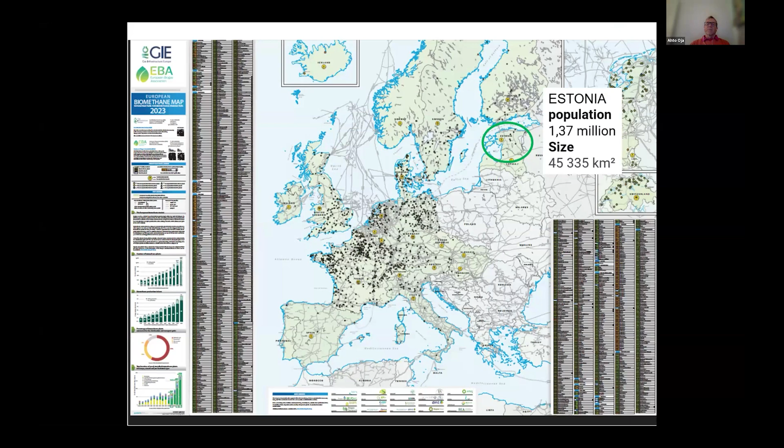That's Estonia, just to show how small we are. Actually, size just 45,000 square kilometers and 1.37 million inhabitants, so pretty small, just to give the overview to the international audience. Historical insights: the first overviews about the potential were made around 2000, almost 25 years ago. After that, my consulting company, Mõnus Minek, was established in 2007, and we were an establishing member of the Estonian Biogas Association, which was again an establishing member of the European Biogas Association. So we are on the scene in Europe since the very beginning.

We had one European knowledge transfer project, Gas Highway, to transfer the best European knowledge and experience of that time to Estonia. And using also this knowledge, we developed the Estonian renewable fuel roadmap as part of a long-term energy action plan. And that was kind of the starting point for the sector development in Estonia. So we first really convinced the politicians and decision makers, and also used the structural funds to support the sector since 2014, I would say. So that's the current situation.

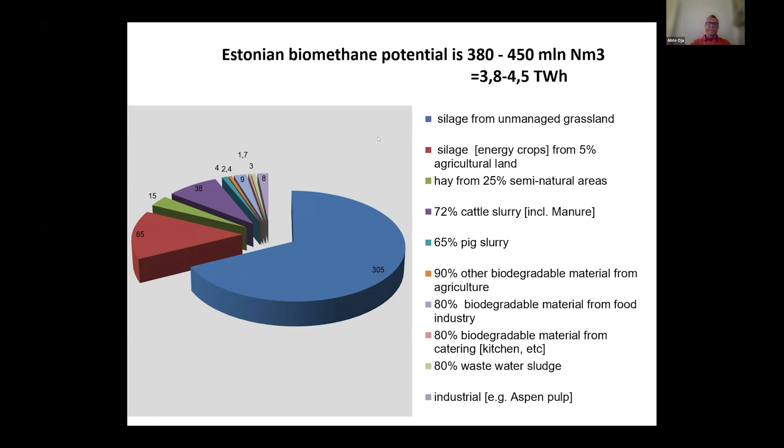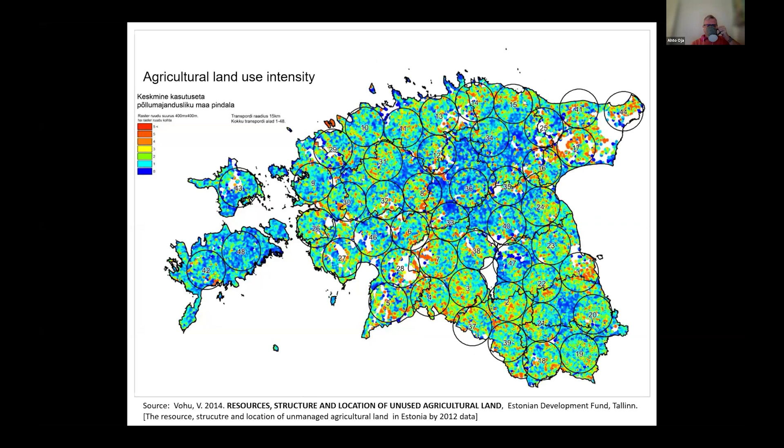The land has been analyzed several times. It shows that blue is more in use, red color indicates that it's less used, and there's unused green biomass. It indicates that at the maximum level we can establish up to 48 biogas or biomethane plants all around Estonia.

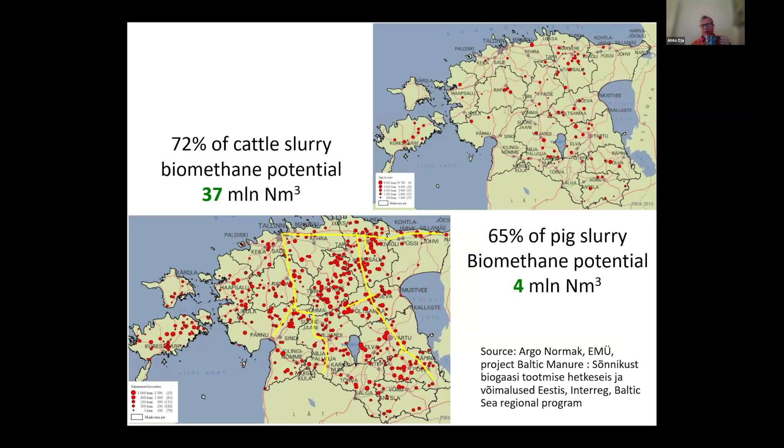This is the current updated map. Here we can see the farms, also the piggeries, chicken farms in yellow, and also the biogas plants on the Estonian map at the moment. And here the black line is the transmission grid.

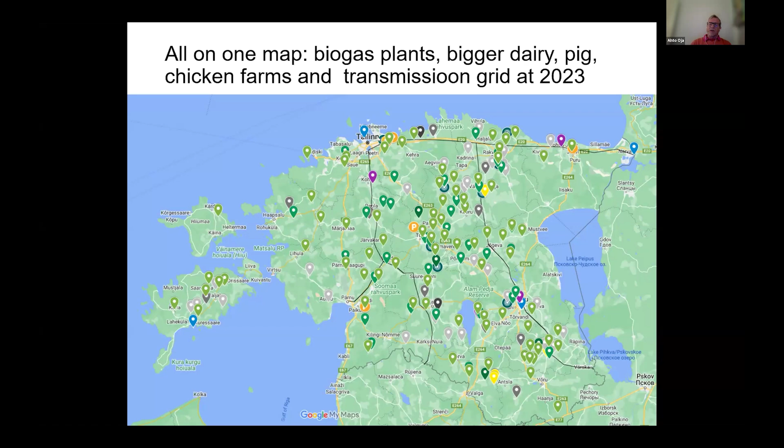That's the consumption in Estonia. We say that there was maybe around 3-4 terawatt hours of natural gas consumption all over Estonia, and in the maximum case by 2050 we can substitute the natural gas with local renewable Estonian biomethane.

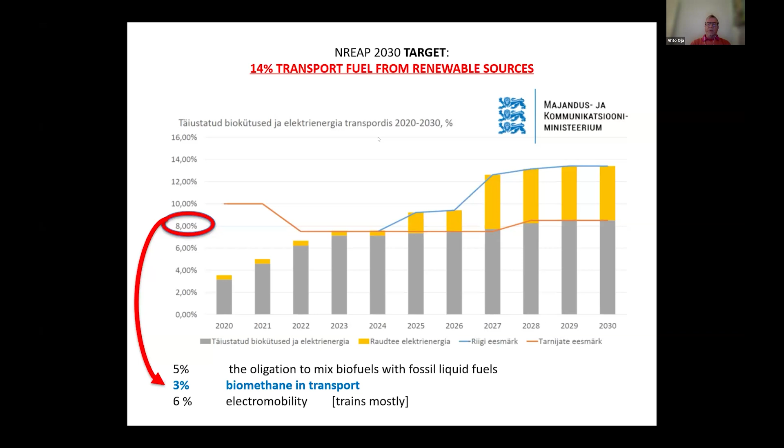There's a national plan for 2030 with an obligation of 14% renewables in fuel, and the plan is that 3% of that will be achieved with biomethane in transport. The reason behind this is that the other renewable targets for electricity and heating or cooling are already achieved and over the target, but in transport it's really on the edge and just catching this target.

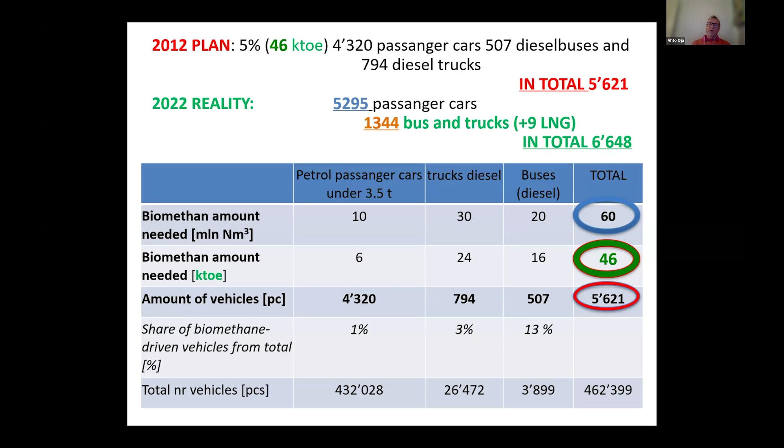This shows the development of the sector with vehicles. In 2012 we made a plan of how many vehicles there could be. The estimation was 5,600, and 10 years later the actual situation was better. We had almost 1,000 more vehicles, in total 6,600 vehicles in transport using biomethane. And also buses in almost half of the counties or cities, city transport which is outsourced by procurement procedure, are using biomethane.

That's the filling station map currently on the website biomethane.info. Everybody can find addresses and locations in Estonia.

And the market has developed with the biomethane register, which has been run by the TSO, Transmission System Operator Elering, since 2021. The biomethane register connects all market participants: producers, sellers, operators, liquid fuel sellers, and soon also hydrogen. Now renewable electricity in transport is also connected to this. This register also issues the certificates and keeps the certificate trading platform up. So those selling either biomethane molecules or certificates can make an offer there, and others can make offers and buy these certificates.

So as I said, to fulfill the national transport obligation, we have to have 14% renewables in transport. This demand can be covered either by physical blending with bioethanol or biodiesel, or you can fulfill this obligation with biomethane certificates. So it really opens the market for biomethane certificates to the total consumption of fuels in transport. The certificates are tradable against other types of fuels. So that's the biomethane guarantee of origin or proof of sustainability. Either you buy bioethanol, or you can buy the biomethane certificate and fulfill this obligation with that.

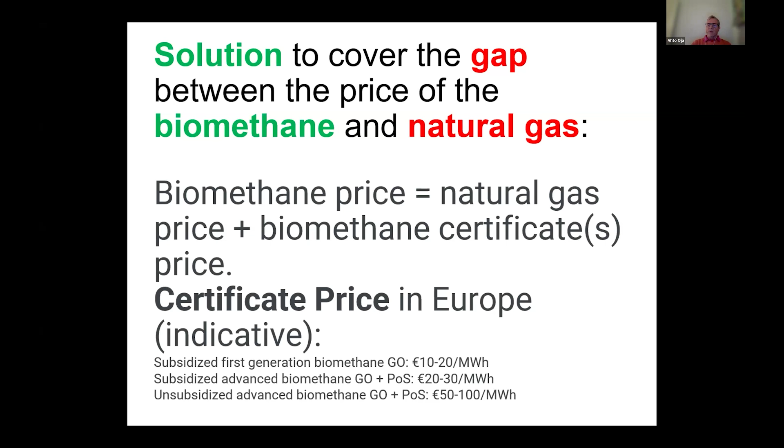And this is the solution to cover the gap. The price of the biomethane certificate is the solution to cover the gap between the biomethane price and the natural gas price. So usually the producer gets the natural gas price for the molecule, and on top of that the biomethane certificate. From our TSO presentation, a first generation biomethane certificate could be up to 20 euros per megawatt hour. And in the best case, both guarantee of origin and proof of sustainability can be between 50 and 100, and it usually depends on the feedstock, location, transport, carbon intensity, and different kinds of factors.

And this is an example. You can also see this publicly yourself on the website. The TSO Elering keeps this data, and it's in Estonian, I can't translate it, but it's bilateral pre-agreements: 130 transactions were made, and the average price was 103 euros. In the second quarter of 2024, it was 131 transactions, and the price was 121. So the average price per quarter is indicated on the TSO website, the Elering website.

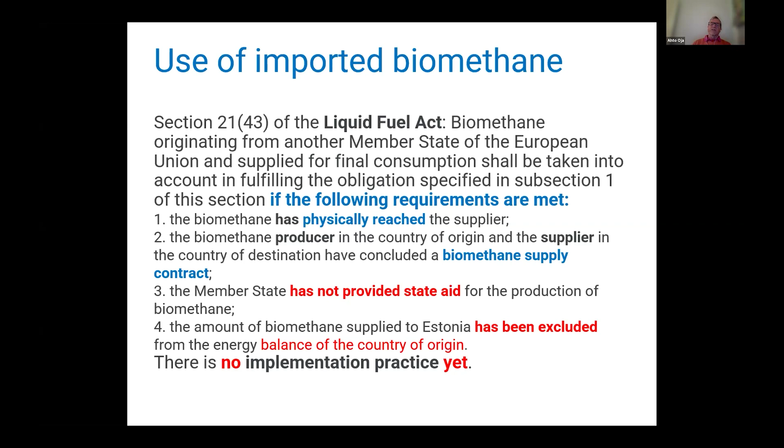And also, starting from the bottom, the implementation practices don't exist yet, but we are thinking of also importing and exporting. If it is imported, then it has to be physically delivered here, it has a contract with the seller, and it has to be not provided state aid. And the amount imported to Estonia has to be excluded from the exporting register, to avoid double counting.

And if we want to export, it's also now possible by the legal acts. We can inject into the transmission grid, and then in that case the certificate will be removed from the Estonian register, transferred to the importing country, and counted as their part.

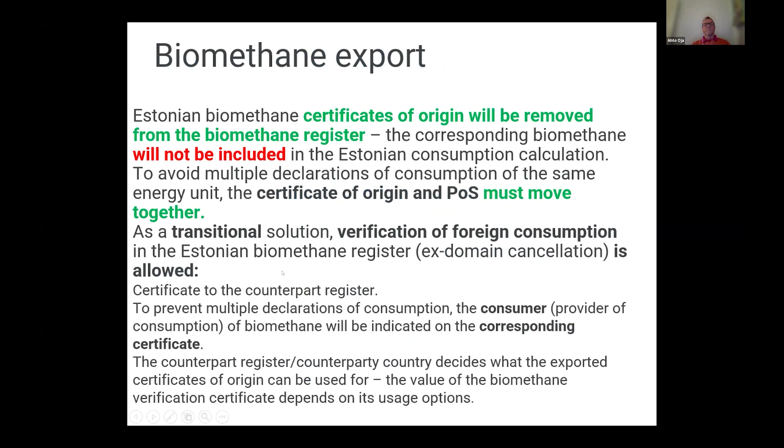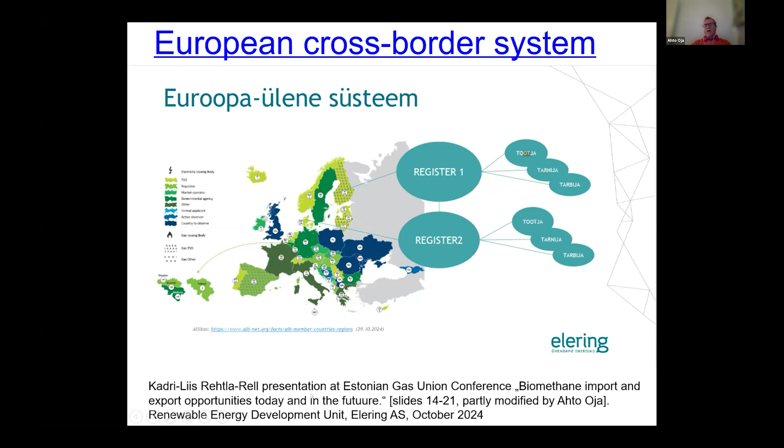And the European cross-border system is that the registers of different countries have to make agreements, either bilateral or maybe in the future pan-European, and then the producers, transporters and sellers can trade, import and export biomethane through these registers. And the last 7 slides were from Kadri-Liis Rehtla-Rell's presentation, just for clarity.

I didn't count it in minutes, so I think we are close to 10 minutes. Ryan? Yeah, approaching there.

Also, to some extent, digestate as fertilizer is regulated in Estonia. It has to meet certain criteria given in the ministry regulations, and then you can sell it as a product and gain extra income if not all the digestate is used by the farmer. And those are the plans for the future.

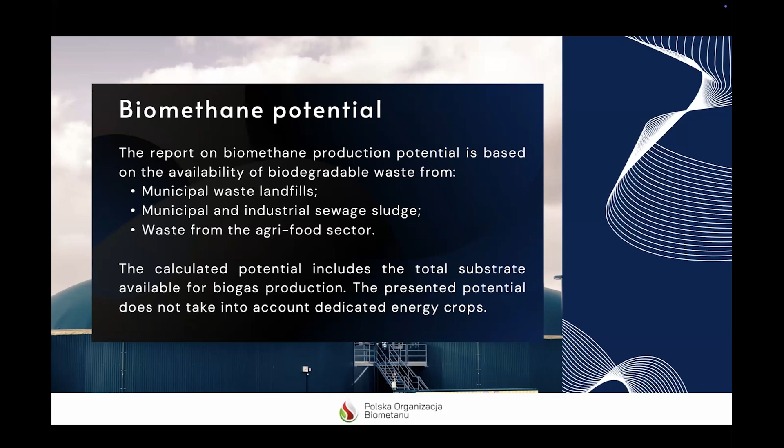Yes, so as a part of our analysis of the potential for biogas and biomethane production in Poland, we applied a three-step methodology. The first step involved analyzing the availability of feedstock, such as municipal waste, sewage sludge, and waste from the agri-food sector. The second step focused on determining how much biogas can be produced from these materials. And the third step was estimating the potential for biomethane production, which involves upgrading biogas into renewable fuel. The analysis was based on data from sources such as the Energy Regulatory Office, the National Support Center for Agriculture, the Central Statistical Office, as well as scientific research and industry publications. This methodology allowed us to accurately assess the possibilities and future prospects for the biomethane sector. Next slide.

So as the first topic, I will discuss biodegradable waste, which can be divided into two categories: selectively collected biodegradable waste and biodegradable waste that forms part of mixed waste. The former serves as a direct source of feedstock for biogas production. Selectively collected biodegradable waste accounts for nearly 36% of all selectively collected waste, and its volume is increasing year by year due to growing public awareness. This trend is clearly visible in the chart below, which shows that the volume of this waste grew from nearly 1.2 million tons in 2019 to nearly 2 million tons in 2022.

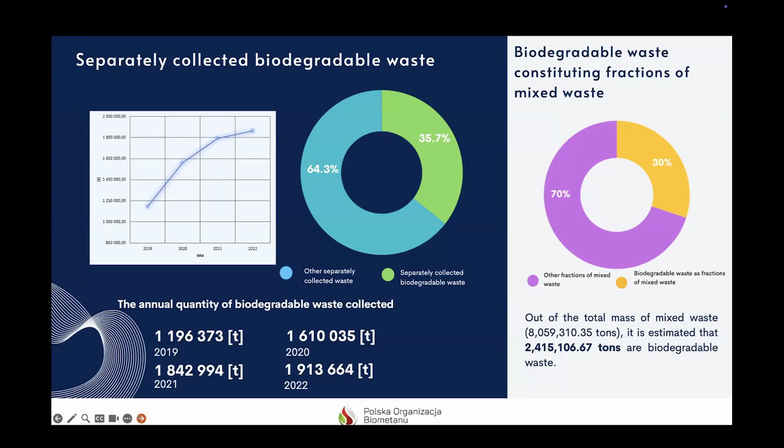Estimating the amount of biodegradable waste within mixed waste highlights the potential increase in biogas feedstock if all biodegradable waste were collected selectively. In 2022, of the total mixed waste of over 8 million tons, as much as 30%, or nearly 2.5 million tons, was biodegradable waste. This illustrates the significant potential for improving waste management and increasing biogas production by enhancing selective collection practices. Next slide, please.

Based on the estimated quantity of biodegradable waste, we calculated how much biogas could be produced and then estimated the potential for biomethane production. Currently, biogas production from municipal waste in Poland amounts to approximately 70 million cubic meters, which could already translate into nearly 42 million cubic meters of biomethane. However, this represents only 13.4% of the total biomethane production potential from this feedstock.

By producing biogas and upgrading it to biomethane from the remaining unused portion of selectively collected biodegradable waste, this potential could increase by an additional 96 million cubic meters of biomethane. Furthermore, if we consider the potential of biodegradable waste within mixed waste, which is still estimated to be greater than selectively collected waste, the total potential from biodegradable waste reaches nearly 312 million cubic meters of biomethane.

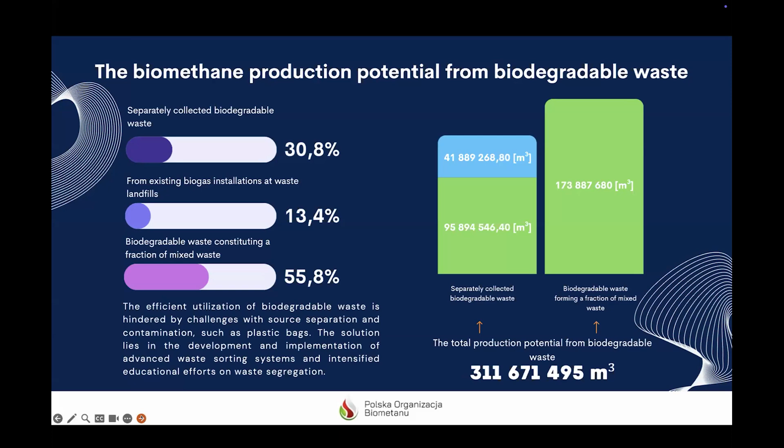These findings highlight the urgent need for development and implementation of advanced waste sorting systems, as well as intensified educational efforts to improve waste segregation. Next slide.

Sewage sludge is currently used in several ways, including use in agriculture, land reclamation, compost production, thermal processing, temporary storage and co-storage, and of course biogas production. What's important is that producing biogas from sewage sludge doesn't stop it from being used in these ways. The digestate left after biogas production can still be used just like untreated sludge.

We should also mention the sewage sludge that has been stored over the years. By the end of 2022, Poland had accumulated more than 6 million tons of sludge. While the sludge initially had great potential for biogas and biomethane production, its energy value decreases the longer it's stored. Over time, natural fermentation releases methane into the atmosphere, lowering its energy potential and increasing greenhouse gas emissions.

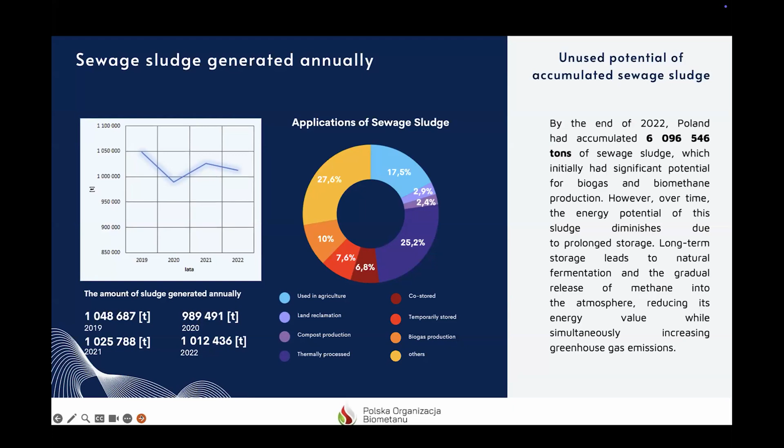This shows why it's so important to improve the way we manage sewage sludge so we can use its full energy potential and reduce its environmental impact. Next slide, please.

The potential for biomethane production from existing biogas installations at wastewater treatment plants is nearly 33 million cubic meters, which represents 14% of the total production potential from sewage sludge. Additionally, the potential for biomethane production from stored and temporarily stockpiled sludge amounts to almost 23 million cubic meters,

and the largest share of the potential comes from the remaining annually produced sludge, which could yield up to 172 million cubic meters of biomethane. When combined, the total annual potential for biomethane production from sewage sludge reaches almost 230 million cubic meters. Next slide.

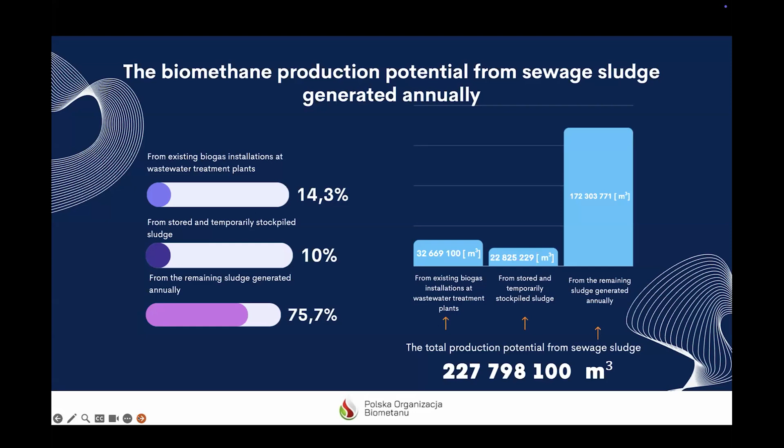And the final sector we'll discuss is also the one with the greatest potential for biomethane production, the agri-food sector. For this analysis, the sector was divided into 3 segments: food processing waste, livestock waste, and straw. The potential for biomethane production from food processing waste was estimated based on the quantities of different waste types. Among these, rapeseed oil production waste has the highest potential for biomethane generation.

The biomethane potential from straw was calculated based on 3 types: rapeseed straw, corn straw, and cereal straw, with cereal straw offering the largest potential of over 5 billion cubic meters. However, it's important to note that straw cannot be used as a standalone substrate for biogas production. It can only serve as an additional component to enrich the feedstock for biogas plants.

The most promising potential comes from livestock waste, with over 4 billion cubic meters from manure, over 2 billion cubic meters from slurry, and over 800 million cubic meters from poultry litter. This represents a huge potential that remains almost entirely untapped in Poland. Currently, only 0.1% of manure, 5.4% of slurry, and 0.3% of poultry litter are utilized for biogas production.

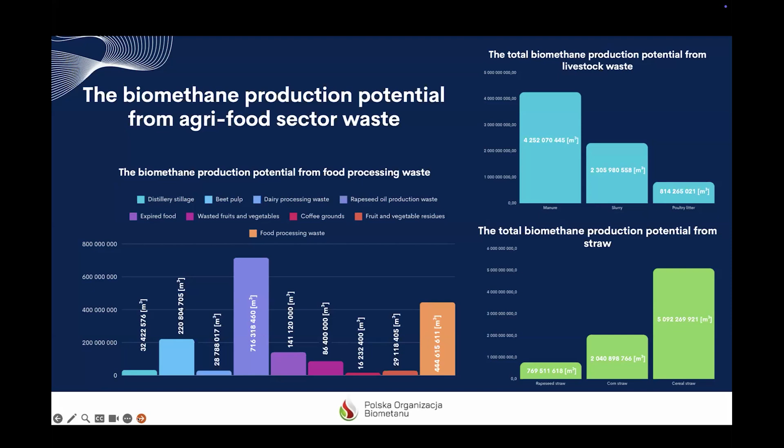At present, there are no installations in Poland for upgrading biogas to biomethane, underscoring the urgent need to develop infrastructure to unlock this waste potential. Next slide, please.

To briefly summarize the agri-food sector, the potential for biomethane production from food processing waste is over 1.7 billion cubic meters. From livestock waste, the potential exceeds 7.3 billion cubic meters, and from straw, the potential is 6.6 billion cubic meters. Altogether, this adds up to a total biomethane production potential of 15.6 billion cubic meters. This highlights the immense opportunity within the agri-food sector to significantly contribute to Poland's biomethane production capacity.

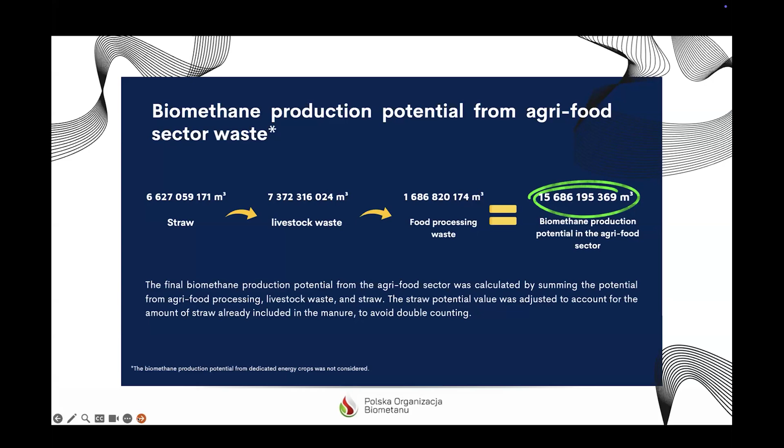So, to conclude, the total potential biomethane production from the 3 discussed sectors is estimated at 16 billion cubic meters. However, the goal of this study was also to identify a realistic production potential for biomethane in Poland, taking into account the limitations and challenges discussed earlier in this presentation, such as inclusion of biodegradable waste within the mixed waste fraction, straw being unable to serve as a standalone substrate and only as a complementary feedstock in biogas plants, and the fact that the livestock waste potential considers all registered farm animals in Poland.

The realistic production potential of biomethane in Poland is estimated at 9 billion cubic meters. It's also important to note that the report's final assessment did not include the potential of dedicated energy crops.

And the last slide, please.

So thank you for your attention for this presentation. As you see, the potential for biomethane production in Poland is substantial, but unlocking this potential will require targeted investments, infrastructure development, and emphasis on sustainability. I hope this presentation has provided valuable insights and highlighted the opportunities within the biomethane sector. Thank you very much.

Could you move it to full screen, Joaquim? Yes, I will. Sorry. Thank you. Now it is. Very well, thank you.

So Sysadvance was founded in 2002. It's a 22-year-old company, and we have specialized in gas separation processes from the beginning. It's a spin-off from academia, and we have developed products for the industrial, medical, and energy sectors. We started producing oxygen and nitrogen generators for industry. Then we evolved to medical solutions for hospitals, like medical oxygen, which was very useful during the COVID pandemic. And since 2015, we are producing solutions to upgrade biogas into biomethane.

We usually provide turnkey solutions, so we take the product from the client, an inlet gas, and we deliver to the client a product within the specification that is required. And within biogas upgrading, we have a full range of solutions, as well as a different line for landfill gas upgrading.

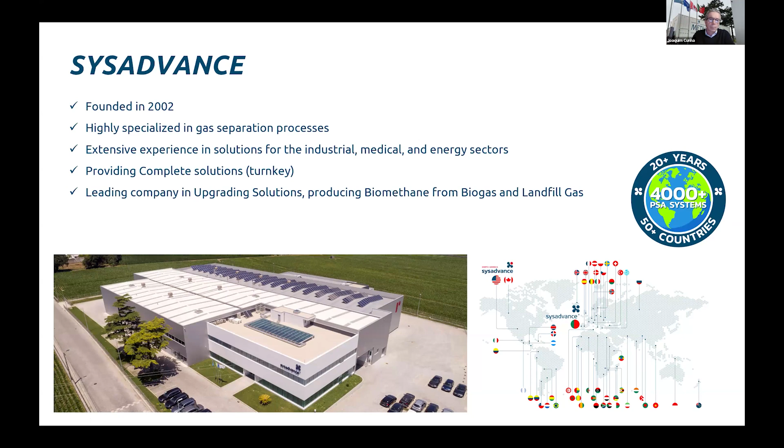Basically, the company is super specialized in everything that is related to adsorption. We have an internal lab that allows us to make real experiments. We have the ability to make numerical simulations. So in the end, we are able to pre-test what is going to happen in real life with a real gas. We are still a spin-off from the university. We keep a very strong relationship with the university, which allows us every year to integrate people from the academic world, bringing new knowledge to the company.

And the company is based, we have a headquarter in Porto, and then we have a company in North America that was created 2 years ago.

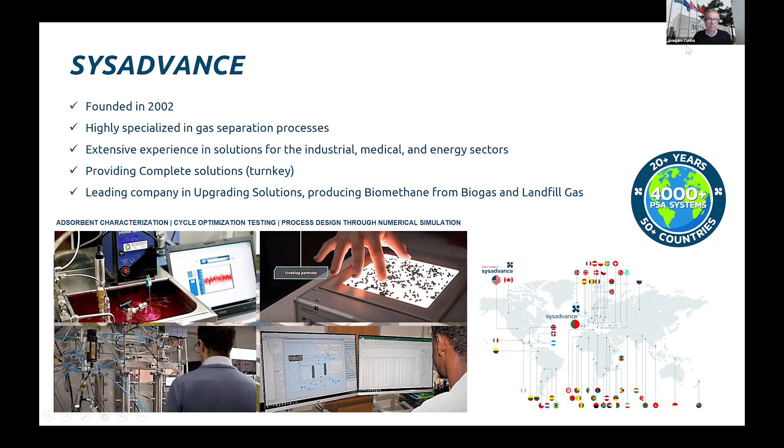And they are primarily upgrading biogas from agro-waste. The second source for biomethane production would be organic municipal solid waste, as well as landfill gas.

Returning to the countries, to the Eastern Europe countries, so we see a significant opportunity. Some countries like Poland, that was previously presented by Martyna, are leading in biogas production. There is a big opportunity for biomethane production, but also Czech Republic and some others. The Baltics, in which I will focus my presentation, precisely Latvia, there is a potential, but there are still some challenges like infrastructure, like regulatory challenges that we need to solve in order to get a sustained growth of the industry.

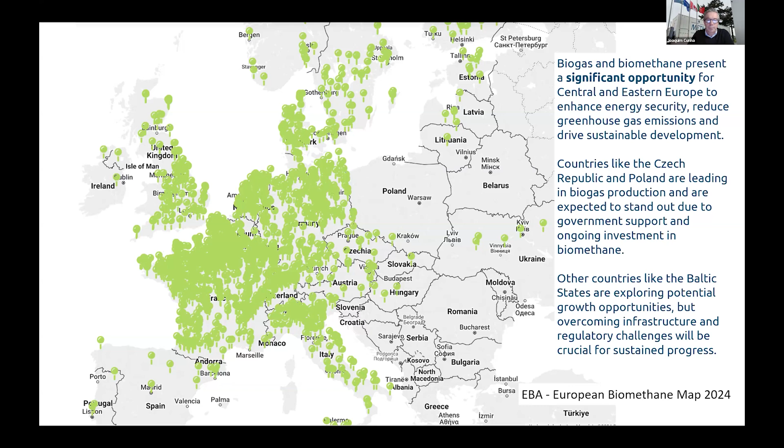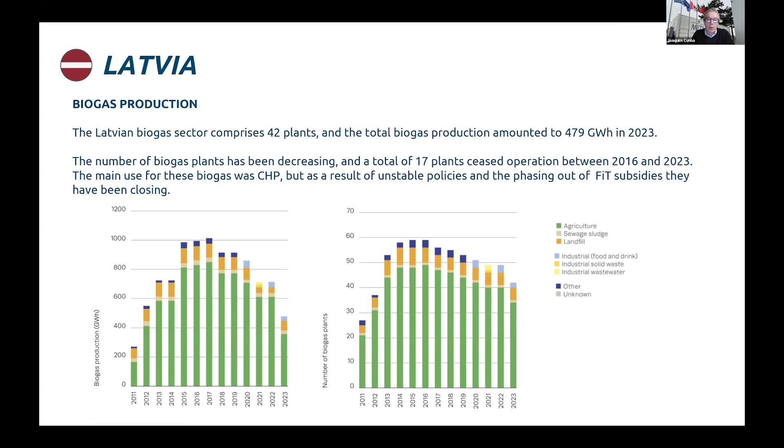When we look into biomethane production, the market needs a more comprehensive strategy, as for the time being, no biomethane framework is in place, although a lot of efforts are being made to implement it. The first biomethane plant was installed back in 2020, and they were producing exclusively for a fleet of vehicles of the company.

Later on, the biogas plants need to transition from electricity to biomethane, as the electricity was no longer viable. Some of them have already made this transition, mainly using their own resources due to a lack of a support policy in place. And this product is mainly being exported. Sysadvance has built one first plant in 2023 and has built 3 others in 2024, which means that at this time we have 4 plants in operation in Latvia. And we know that some greenfield projects are also currently in development phase.

Additionally, as there's a lack of infrastructure, there's a pilot project funded by the European Union in order to install a collection point where biomethane producers could take their compressed biomethane in order to inject it on the grid. So like a collection point that will allow to develop a virtual pipeline.

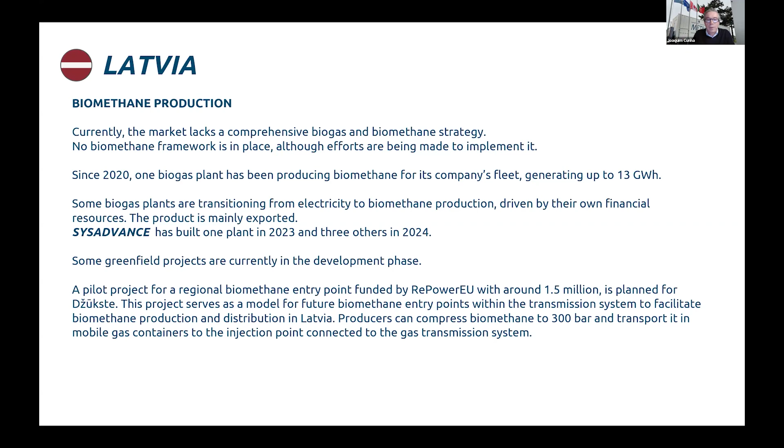What is important for development of the market is the certificates market, as most or part of the biomethane being produced is exported to neighbor countries.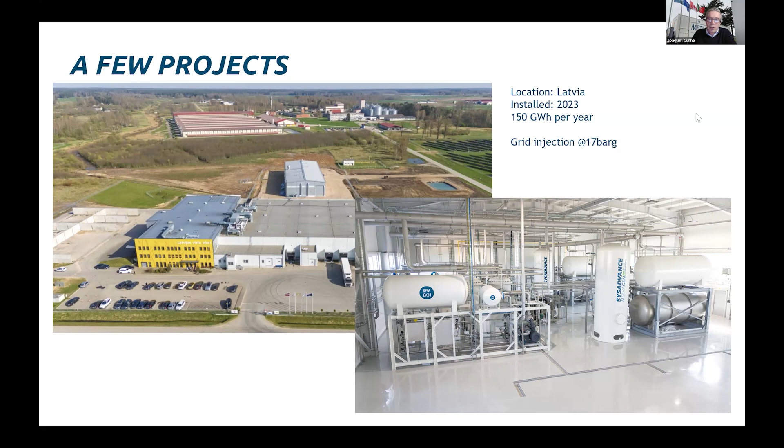We are producing biomethane that we are injecting in the grid at 17 bar with a recovery higher than 99.5%. It's an indoor project, as you may see, and additionally, it has the possibility to produce LNG or even to liquefy CO2 in the second phase. Here you have the image. This was when we started injecting, it was the first plant injecting into the Latvian grid back in April this year.

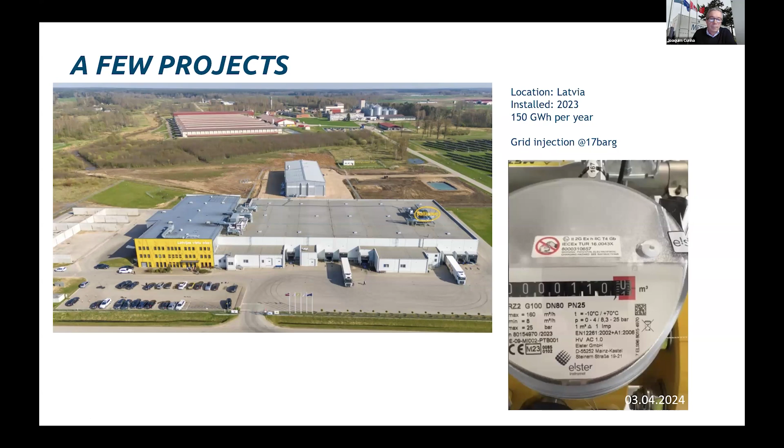Second project, not far away from the first one, and this one is not from chicken manure. This one is from agro waste, with a total capacity of 1,000 normal cubic meters of biogas, also injecting into the grid. This one started in operation last July, so 5 months ago.

The third project, still in the nearby region. This one is treating 600 normal cubic meters of biogas. And in this case, as we are not close to the pipeline, we are compressing at 250. And the biomethane is traveling to a nearby injection post. It's a project from the same client, so we are using the same injection post for this injection.

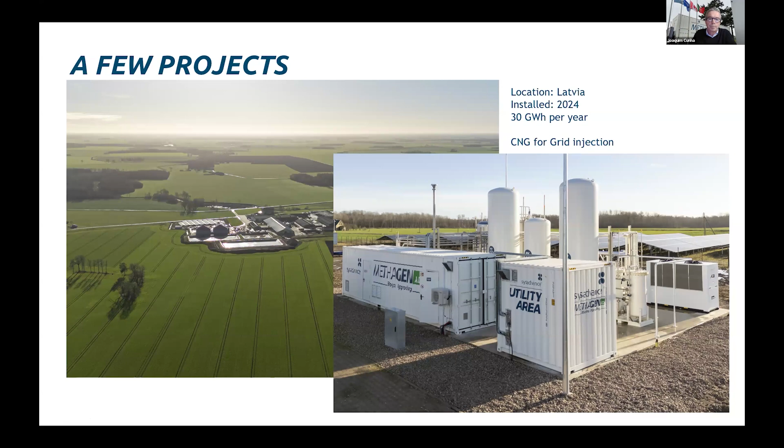The fourth project I've mentioned to you, and that started in operation in September this year, so 2024, is also treating 1,000 normal cubic meters of biogas. And again, we are compressing biomethane in order to transport it to a nearby pipeline. So this is basically what we have done.

It's true that in the market in Latvia there's a lot of potential, there's still potential for growth, but we have been fortunate to install these 4 units in the last year and a half, which makes us very proud, and we hope to follow opening opportunities in the region, not only in Latvia, but also in the neighbor countries like Estonia, Poland, etc.

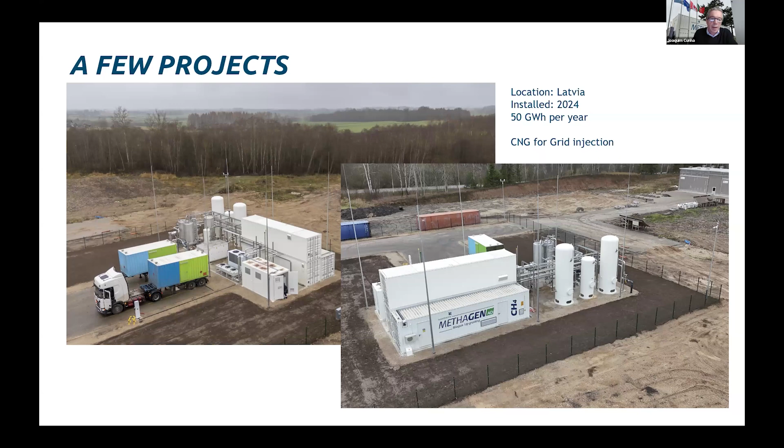Basically, and arriving to the end of my presentation, as main advantages of our upgrading technology, we have the flexibility. I mean, the possibility to customize the media to adapt to more difficult inlet gas compositions. The specific power that is lower than some technologies that you might find in the market, which in the end is very important, as projects, besides capex, need to be evaluated in terms of opex, so in cost of operation.

The possibility to reduce contaminants like oxygen and nitrogen in order to make sure that we comply with the grid specification. A recovery that is higher than 99.5 for the biogas coming from anaerobic digestion. And finally, and not least important, the fact that we are the owners of the technology. We are behind the total design of the process and its engineering, which is an assurance for our clients.

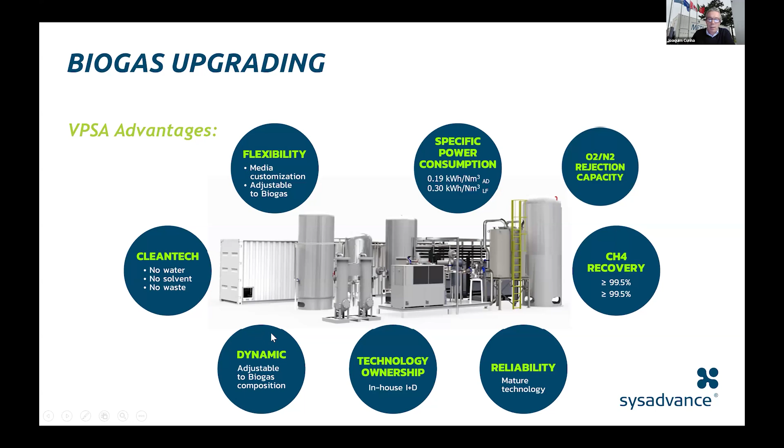So this is it. I hope this presentation is helpful to have a better understanding of this market and the region and of what can be done. And I remain at your full disposal for any clarification question you might need. Thank you, Ryan. Thank you.

Maybe one question before we ask a more general one for all of our speakers. So as an equipment supplier, what expectations do you have, or what are your experiences working in this region? Well, we have high expectations for the region. In fact, following these 4 projects, we look for some additional projects that we are actually negotiating, and additional to that, we are opening an office in the region. So we are going to have a local team, both commercial, that we already have, as well as technical people on the ground for assistance and to be closer to our clients.

Finally, and I think it's worth mentioning, we do believe that countries like Poland are going to be very big markets in terms of biomethane in coming years. So we are carefully looking to Poland and some other neighbor markets that have potential for biogas production and biomethane production. So very, how can I say, very optimistic about the development of the region.